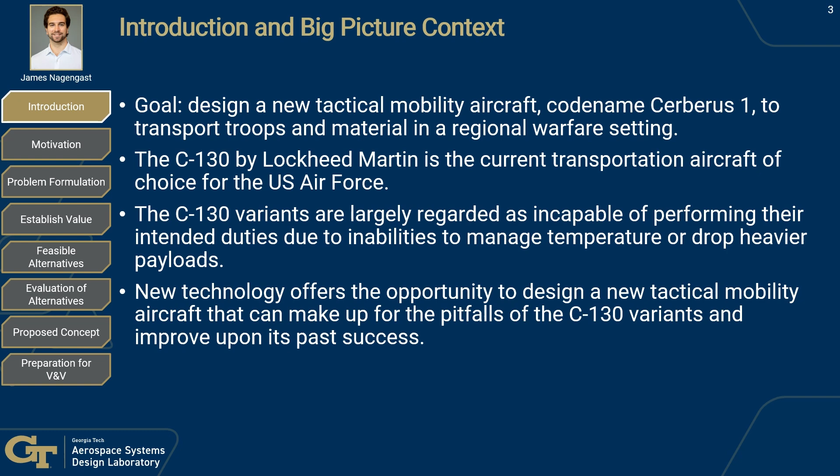The C-130's success is related to its ability to focus on separate missions and to be improved upon with each new variant. But what if these problems were addressed in the first variant of Cerberus-1? With new technologies and processes allowing for better systems engineering that can directly identify and mitigate thermal regulation problems, as well as other pitfalls of the C-130 through MBSE and MDAO, the potential for the Cerberus-1 is extremely promising.

Due to the military transportation focus of Cerberus-1, its primary stakeholder is the Air Force Research Lab, or AFRL. As they focus on many of the downsides of the C-130, Cerberus-1 attempts to meet their concerns head-on with new technologies and design considerations. While addressing the concerns of the C-130, the development of Cerberus-1 will also consider the successful aspects of its predecessor as it aims to meet the same level of versatility.

Cerberus-1 aims to meet its different missions in a new manner, as its design focuses on modularity, so that it can be fitted to any configuration that is demanded of it. It also aims to do something unprecedented in terms of tactical mobility aircraft: meet the demands of the troops that use it. It will meet the successes of the C-130 while making up for its failures and simultaneously bringing a level of comfort to improve its user experience to make them as efficient as the aircraft they're piloting.

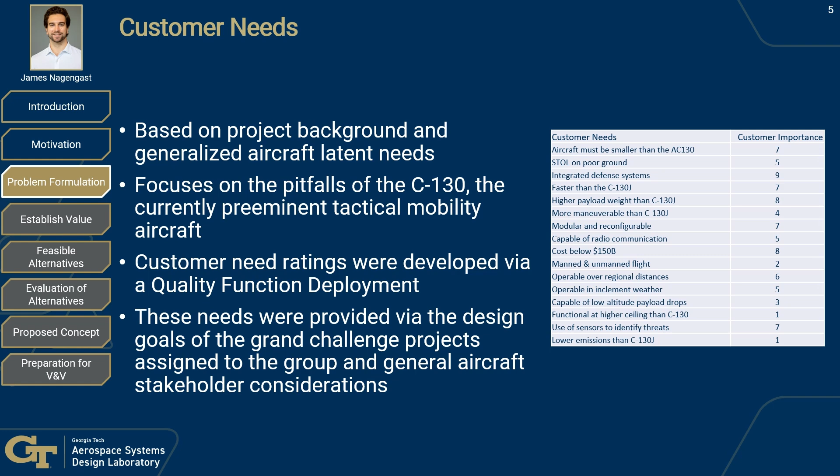While AFRL provided certain desires within the new aircraft, it was important to consider the successful aspects of the C-130. A combination of both aspects, as well as generalized military aircraft considerations, helped to develop a list of 16 customer needs to be met by Cerberus-1, using a quality function deployment. These customer needs were then weighed and used to develop engineering characteristics of the aircraft. The engineering characteristics developed by the QFD were also limited to 16 most important aspects of the aircraft.

Overall, these characteristics came to focus on 3 specific topics: size, weight, and operability. These include major aspects of a standard aircraft flight envelope, as well as payload and weight considerations. These major needs will address several aspects of a successful aircraft, such as operable terrain, storage, and fuel efficiency. These targets set the basis for the success of Cerberus-1.

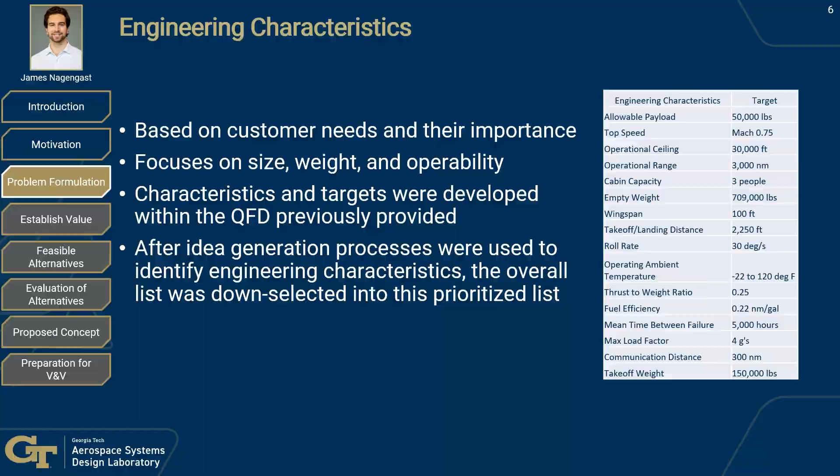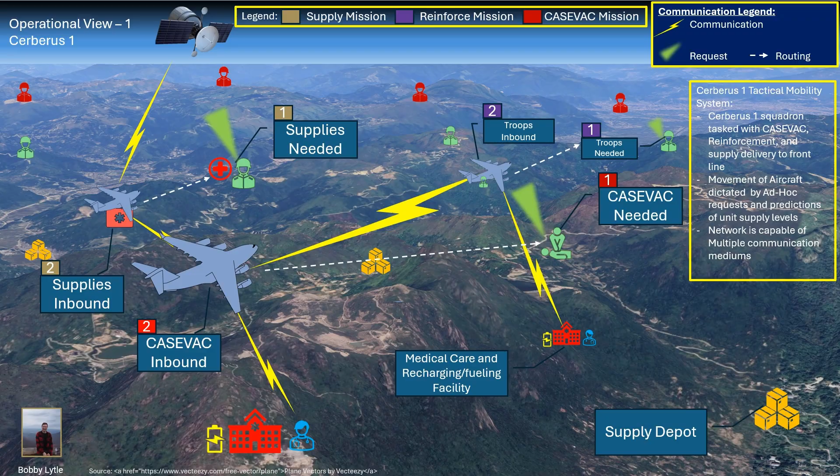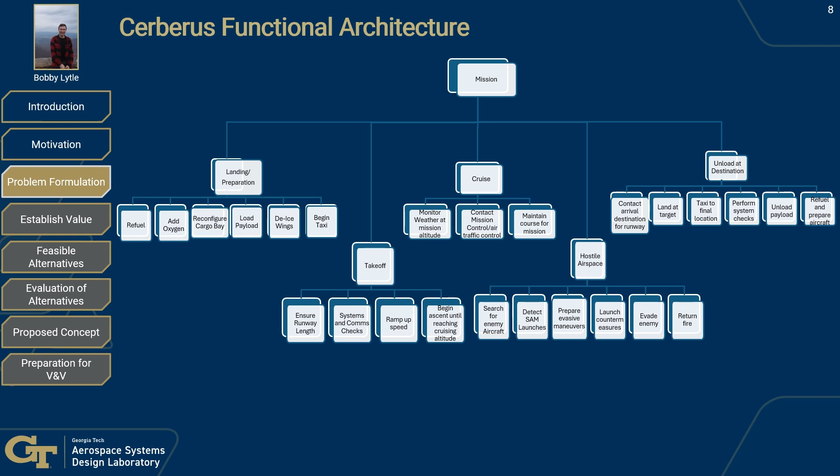Next is hostile airspace, which involves the detection of enemy aircraft and SAM launches, evasive maneuvers, as well as any offensive measures. The final stage is landing and unloading the payload at the mission target.

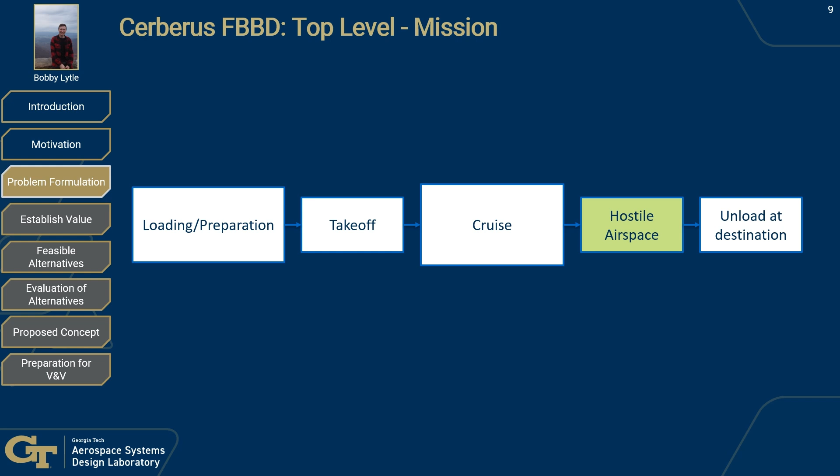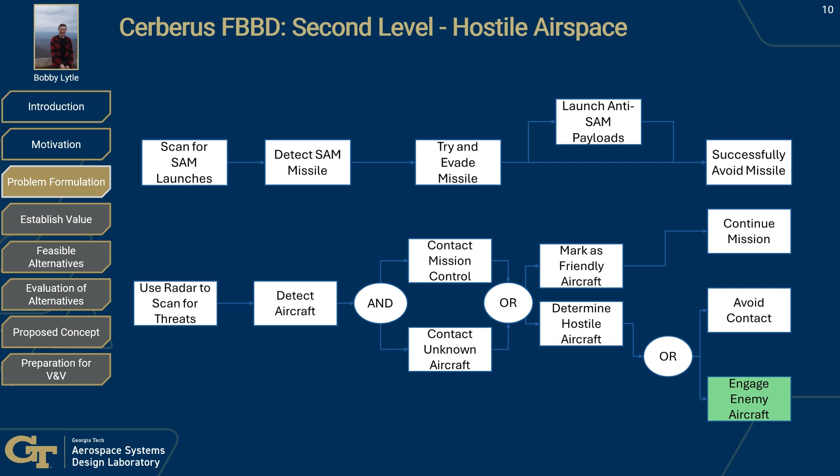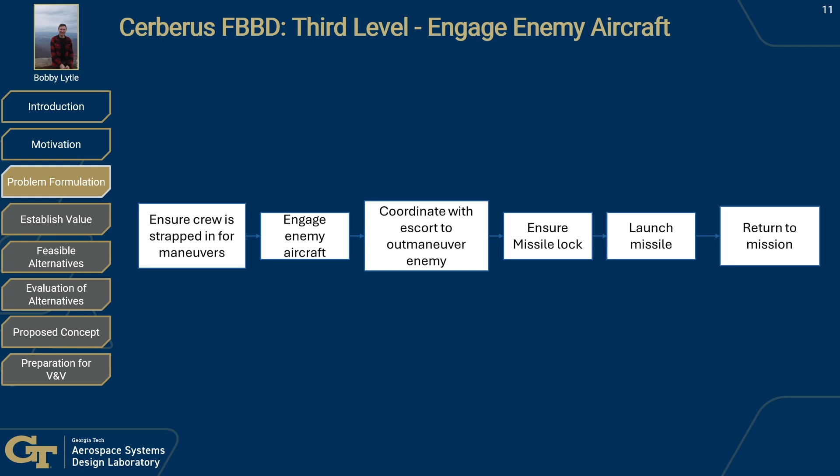Our requirements were heavily based on the current capabilities of the C-130. As James explained earlier, we want to surpass the capabilities of the C-130 and not just simply meet them. We plan to accomplish this by taking advantage of technological developments that have come out since the C-130 was designed.

With these requirements, Cerberus 1 will be more compact than the C-130 with a shorter wingspan. It will also perform better with a higher maximum payload, range, speed, and operable ceiling. Cerberus 1 will also have a lower empty weight, which allows for more of the total weight to be allocated to payload specifically.

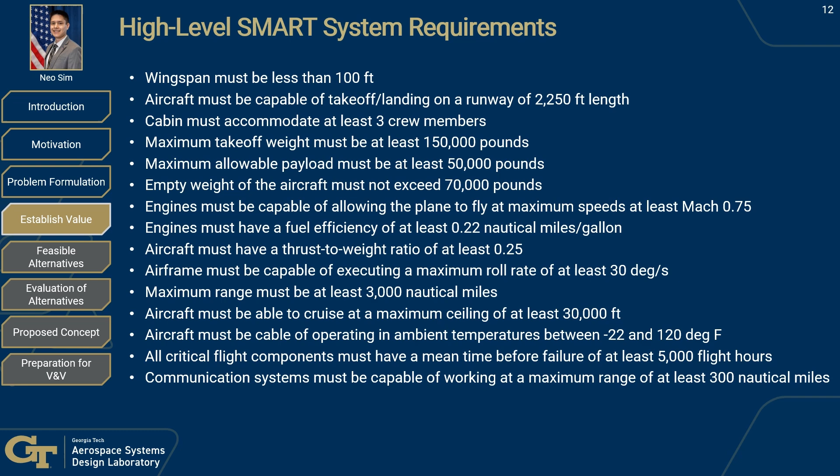All of these requirements were documented and organized using model-based systems engineering, also known as an MBSE model. When it came to ranking the metrics for these requirements, the team had to agree on a set of criteria that reflected the overall project's goals.

We decided that we wanted Cerberus 1 to be the best tactical mobility aircraft for years to come, prioritizing performance and the meeting of mission needs over the physical size or cost considerations.

As an aircraft that will be heavily used for transportation of troops or cargo, we decided to prioritize weight-related requirements as well as range at the top. This would ensure that Cerberus 1 will prioritize transporting the largest payloads the furthest distance.

While at the bottom, requirements like physical length of the wingspan and mean time before failure of components were ranked lower. Mean time before failure was considered a cost-related metric, as with enough investment, we reasoned that parts and maintainers can always be on hand to regularly replace aircraft components.

Investment in Cerberus 1 will be high, but it will be a best-of-its-kind aircraft for years to come.

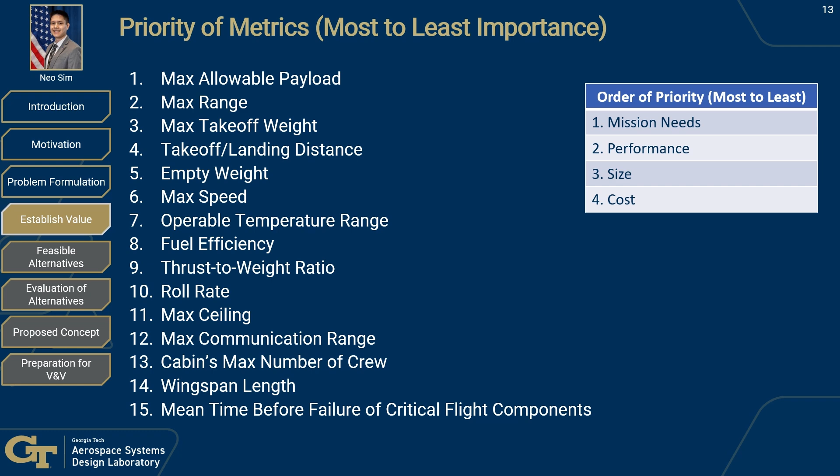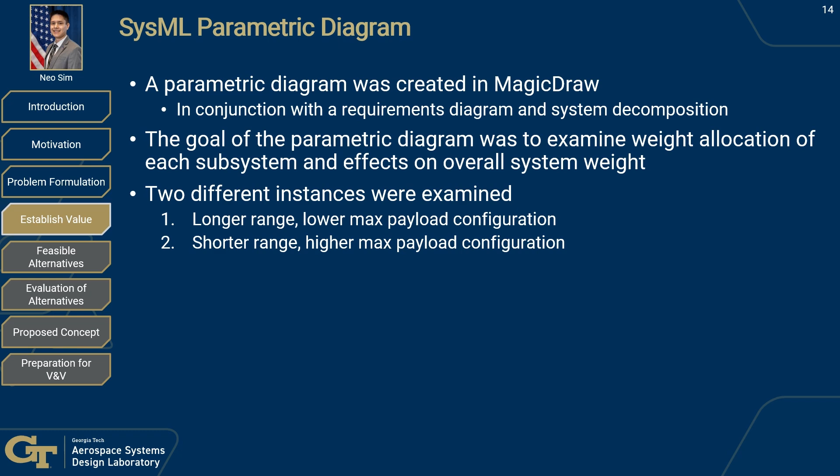Within our MBSE model, we also created a parametric diagram to investigate two different configurations of the aircraft. Our goal was to investigate how the weight allocation of each subsystem would change under two different configurations. The first configuration was designed to maximize range at the expense of payload, while the second configuration was designed to maximize payload at the expense of range.

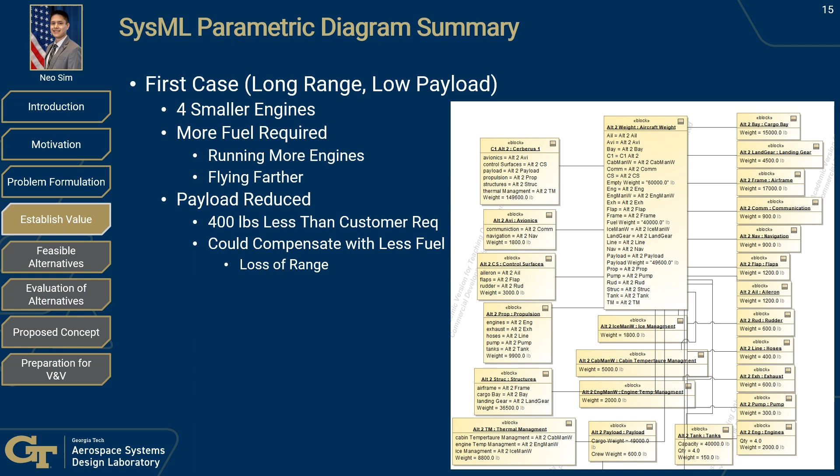The range-optimized configuration took up much more weight for components like engines and fuel. The range was maximized by utilizing 4 smaller engines with larger fuel storages, which meant less of the overall weight allocation was able to go to payload.

The payload-optimized configuration gave a much higher allocation to payload while reducing fuel storages. It also implemented 2 larger engines that overall weigh less than the 4 smaller engines. However, the larger engines could produce more thrust per engine to accommodate the larger payload.

Case 2 did a better job of meeting the needs of a tactical mobility aircraft to be able to carry more cargo, so we decided to further develop this concept.

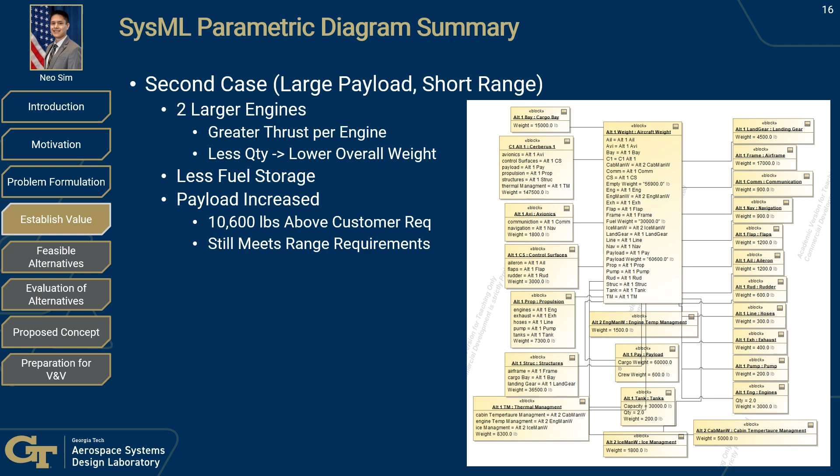These selections give Cerberus 1 a good balance of high-tech subsystems like advanced stealth capabilities against tried-and-true subsystems like a fuel-based turbofan engine. The key here was finding elements of the aircraft that would best suit its needs while being realistic about the technological readiness of each component, which influences how soon and how effectively the technology can be implemented with Cerberus 1.

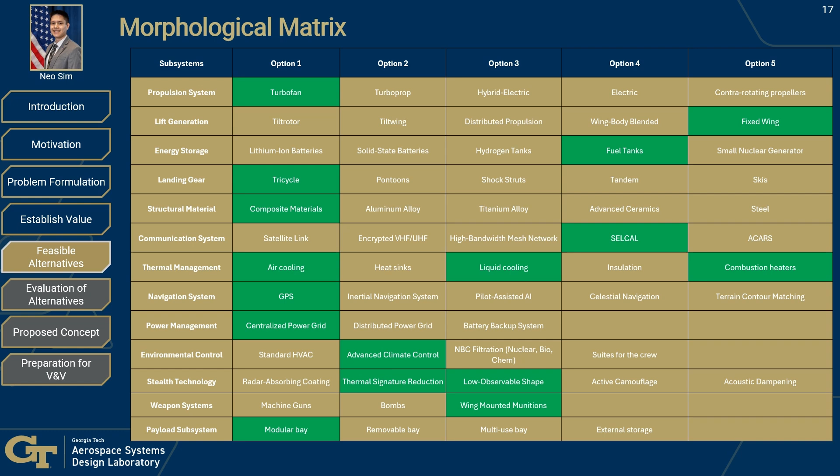With these components, we will be able to give customers a cutting-edge aircraft that will still perform reliably. The propulsion system is one of the most critical and expensive components of the Cerberus 1 aircraft, making it the logical focus for our first trade study.

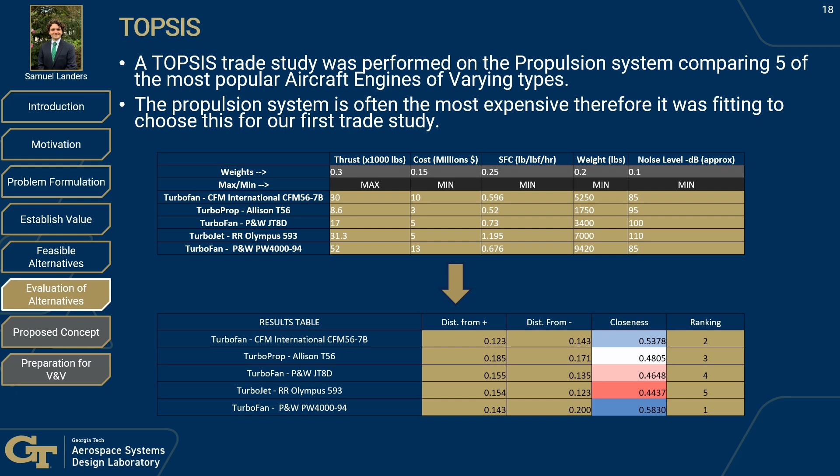Using the TOPSIS method, we evaluated 5 engine options against key criteria such as thrust, cost, specific fuel consumption, weight, and noise level. This rigorous analysis provided a clear ranking of alternatives. As shown here, the Pratt & Whitney PW4000 emerged as the optimal choice, offering the best balance of performance and cost effectiveness. This decision ensures that Cerberus 1 meets its operational requirement while staying within budget.

Our comprehensive analysis and trade studies have culminated in this initial conceptual design for Cerberus 1. It's a modern tactical mobility aircraft that blends innovative aerodynamic efficiency, modular payload capability, and advanced propulsion technology. This design ensures that the aircraft will excel in diverse mission profiles, from high-altitude surveillance to rapid supply delivery.

This is not just a vision. It's a practical, achievable design backed by robust engineering and analysis.

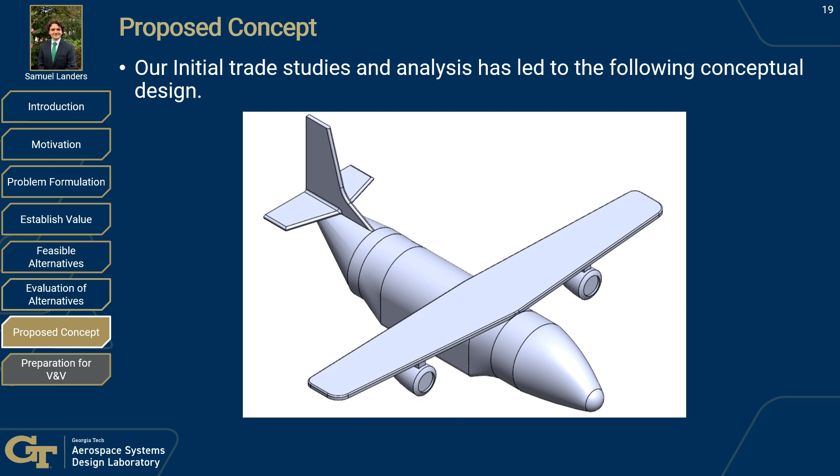Ensuring compliance with size and operational requirements is a cornerstone of the Cerberus 1 project. Here you can see how we plan to verify each critical requirement using methods such as inspection, testing, demonstration, and computational analysis. For example, runway performance will be validated through controlled landing tests, while structural analysis will ensure the aircraft

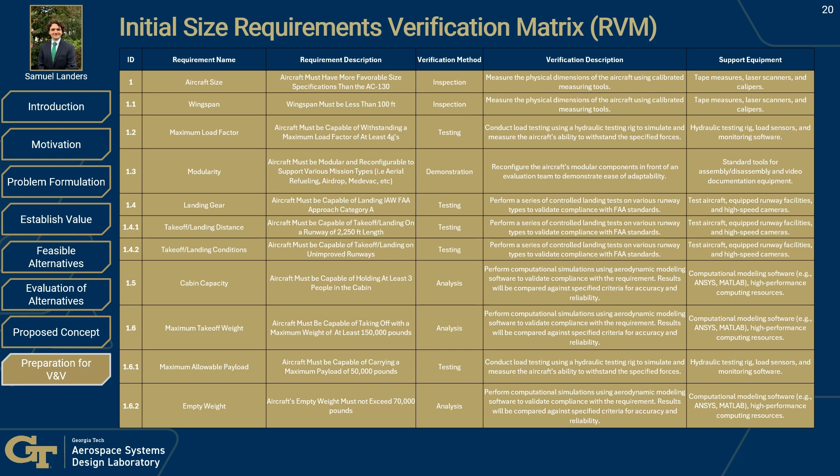meets maximum payload specifications. Every requirement is paired with a clear verification method and the necessary support equipment, leaving no room for uncertainty in performance validation.

Every ambitious project comes with risks, and Cerberus 1 is no exception. We've conducted a thorough risk assessment identifying potential challenges across design, operations, and supply chain management. Each risk is categorized and matched with targeted mitigation strategies.

For example, supply chain delays are addressed by diversifying suppliers and maintaining inventory reserves, while defense system failures are mitigated through robust redundancy and rigorous testing. This proactive approach minimizes uncertainties and ensures project success.

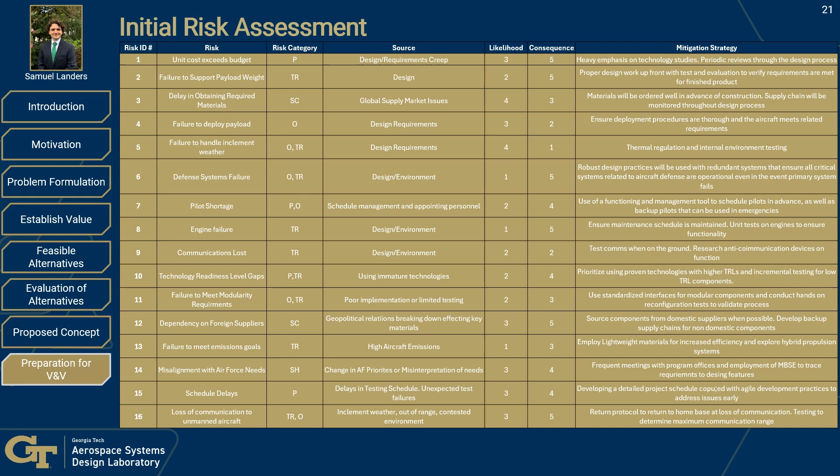This risk matrix provides a visual summary of the likelihood and severity of each identified risk. As you can see, our most critical risks, such as exceeding budget or supply chain disruptions, fall in the red zone, and we've prioritized them accordingly.

By focusing on these high priority risks and implementing our mitigation strategies, we can confidently steer the Cerberus 1 project towards successful completion.

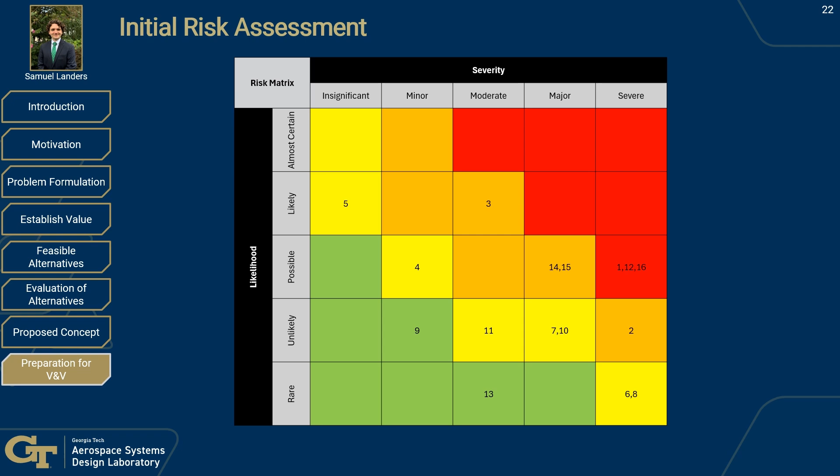To conclude, the groundwork has been laid for the next generation of tactical mobility aircraft. Cerberus 1 is designed not just to meet, but to exceed the operational demands of today and tomorrow. Its versatility and adaptability make it the ideal candidate to support a wide range of missions, ensuring superiority on the battlefield.

With your support, we can bring this groundbreaking platform to life, providing our forces with the tactical edge they deserve.